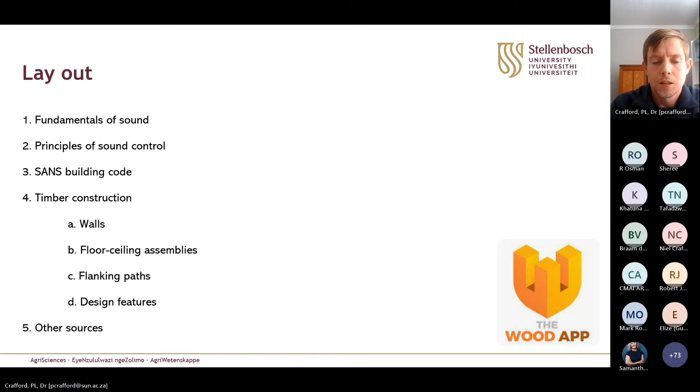So today we will look at the fundamentals of sound and the principles of sound control, how to manage sound behavior, especially in timber buildings. We will look at the two relevant SANS building codes when it comes to residential and non-residential buildings and acoustics. And then we will look at a few timber details, mostly timber frame and some CLT design details for acoustics.

So wood can either enhance sound or absorb and manage sound. We know right across the world we use wood for many instruments, and at the same time a lot of times the recording studios are manufactured from wood elements, so it has the ability to either enhance sound or control sound depending on what you want to achieve.

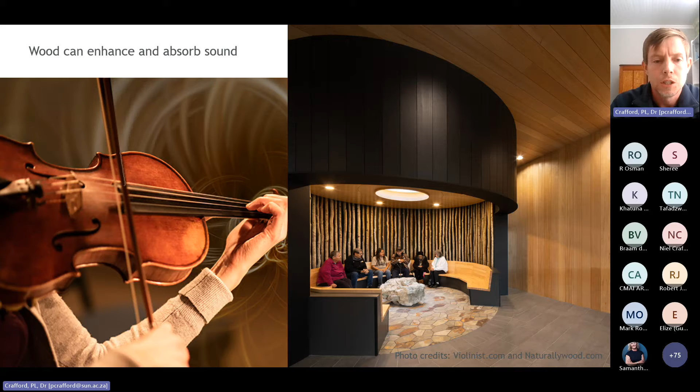Looking at the fundamentals of sound, sound waves propagate in all directions, so it's good to understand how sound waves move from the source. And also sound waves differ in terms of loudness and pitch. You will get either higher or lower amplitudes, and also different frequencies in which sound travels.

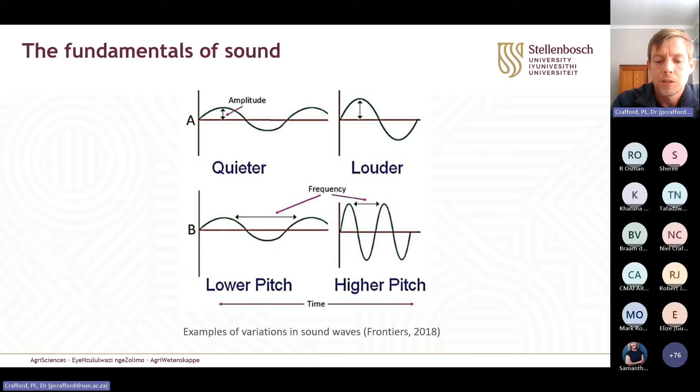Considering the table on the left, the speed of sound differs for different mediums. Air is a lot of times considered as a constant, and the travel speed is only 330 meters per second at 0 degrees Celsius. And then different mediums like brick and wood and concrete have higher sound speeds as the sound wave hits those mediums. And it's interesting to note that there's a difference between softwood and hardwood.

For softwood, the speed of the sound wave would be closer to 3,000 meters per second. For a denser hardwood, it's closer to 4,000. Then you can go all the way up to steel or aluminium, where it's more than 6,000 meters per second.

On the right-hand side, we can look at the table in terms of decibels. That's the loudness, how we typically measure sound. A whisper would be 30 decibels, for example, and a face-to-face conversation, almost similar to what we're having now, would be 60 decibels. And then all the way up to very loud noises like a jet engine of more than 100 decibels, 140 decibels actually.

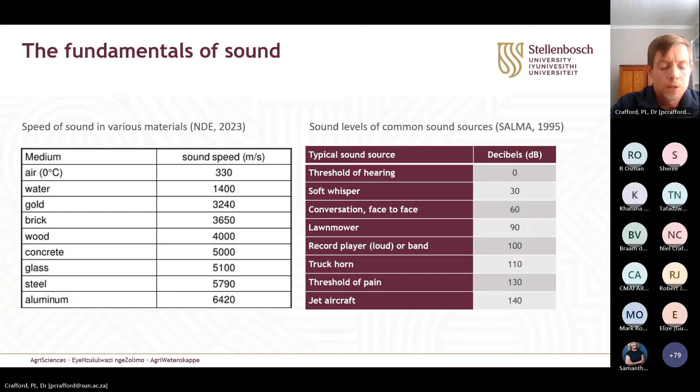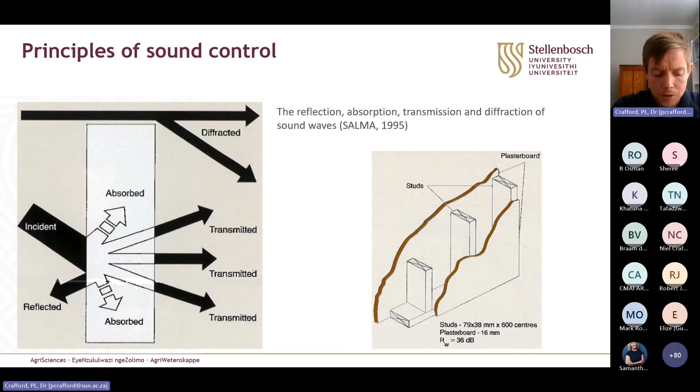So looking at some principles of sound control, or at least the behavior: sound can either be reflected or absorbed, diffracted or transmitted. And if you look at the picture on the right-hand side, if you build a simple internal timber frame or a drywall construction, you would see that that would happen if there's no insulation or the right design. Sound would be either reflected, absorbed, or transmitted without getting a very good decibel grading and acoustic performance. So you might still hear someone in the next room if they shout or speak loudly. So we will look at some details to overcome that issue.

Also managing sound inside of rooms. On the left, you see a perforated sound absorption panel that's used for reverberation control or echoing and managing, I would say, white noise in auditoriums and classrooms to equalize and stabilize the movement of sound and noise.

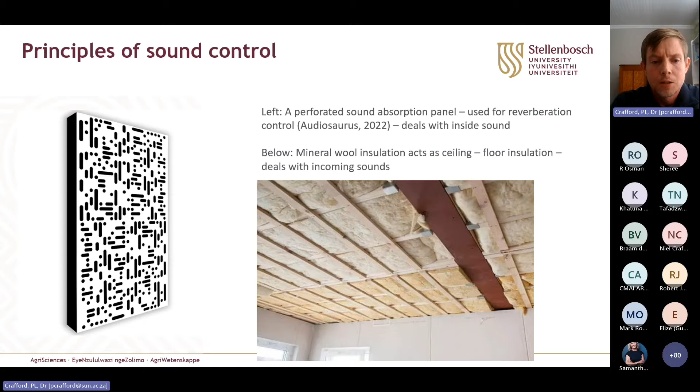And at the same time, on the right-hand side, you will see mineral wool insulation in ceilings. So by adding this, and even a suspended ceiling, you already improve your acoustics by a high degree. And we will look at more detail just now. So this type of ceiling will also manage incoming sound from outside.

Considering two of the relevant building codes that deal with acoustics in residential and non-residential buildings, SANS 10103 deals with the measuring and classifying of areas into either E1 or E2 zones, classified, say, for residential development and perhaps for industrial or other uses.

And then SANS 10218 Part 1 especially deals with the grading requirements for different buildings, on the facades or inside between rooms; different bedrooms or bathrooms all have different gradings. And also, if you look at the tables on the bottom side, table 2 and table 4, they will have an HG and an SG, which stands for high grade and standard grade ratings that one can consider as an architect to obtain your required decibel or performance.

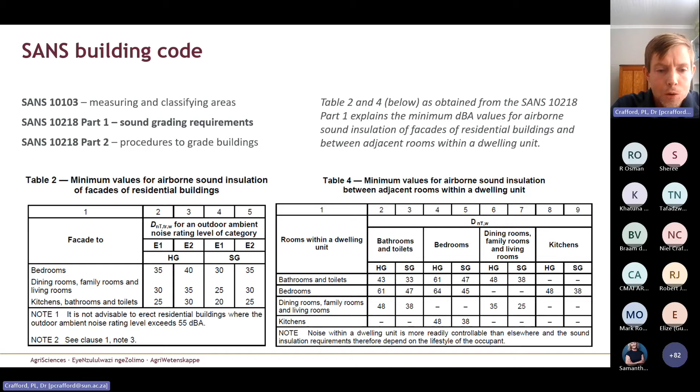What's interesting to note is at the bottom on the left, it says it is not advisable to erect residential buildings where the outdoor ambient noise rating level exceeds 55 decibels. So even if you design the best building, if you use glass or normal doors and a standard roof, you will have trouble managing the indoor noise environment if your outdoor ambient noise is too high. And on the right, it says noise within a dwelling unit is more readily controllable than elsewhere and the sound insulation requirements therefore depend on the lifestyle of the occupant.

So what it's saying is inside noise is a different approach than outside noise, because it's possible to control your inside environment. If you have a teen who likes playing loud music, that's something you can control. Or if you know where to place your bedroom in your house, you can put it perhaps not next to the bathroom or the kitchen, etc. So I will now move to the next part, or perhaps just say something on Part 2.

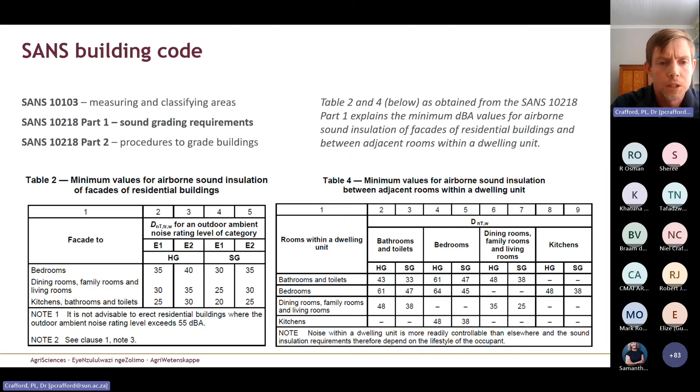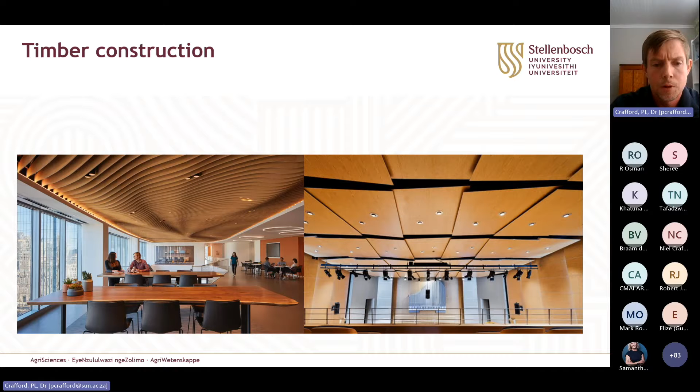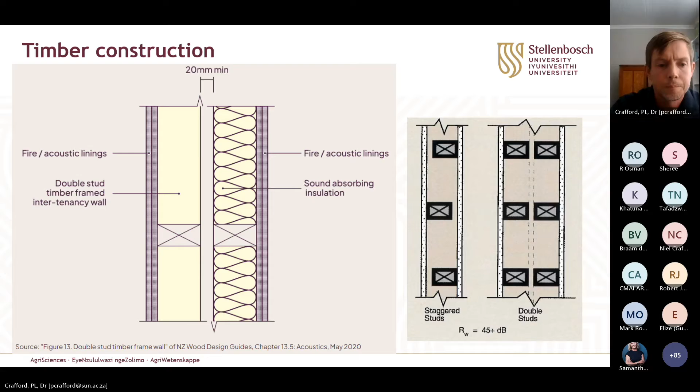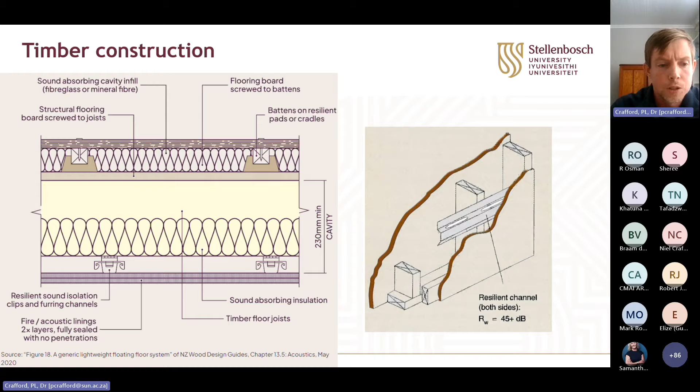And then at the top, there's a subfloor, and then there's the battens on the resilient pads or the cradles. So you can see the top floor is actually isolated from your joist, so it prevents vibration. And then there's some more insulation and your final floor. So you can really build up a Rolls-Royce floor with very good acoustic performance if you do it in the right way. It's important to specify the right resilient channels or furring channels and use the right isolation clips for the job.

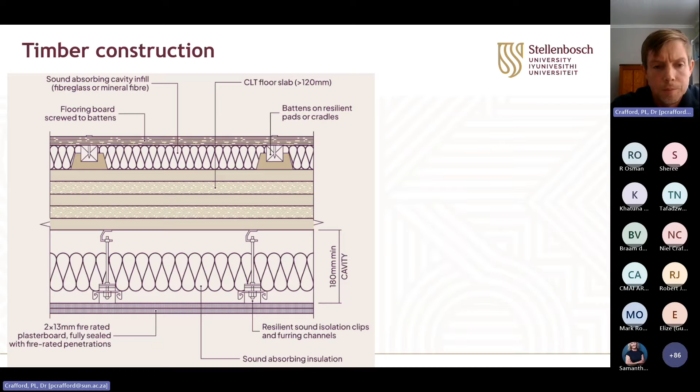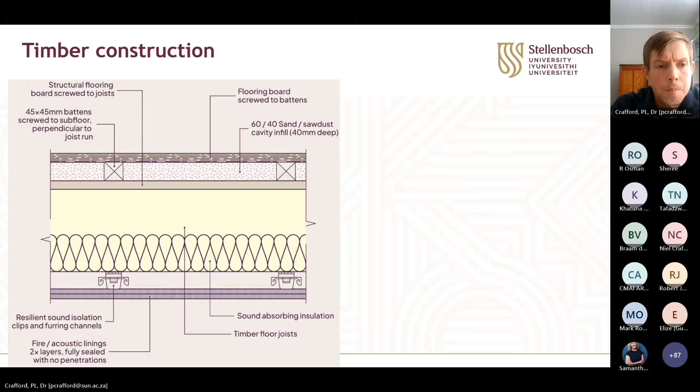And I've been in steel constructions where I could hear someone coming up the staircase in a steel building that is 20 rooms away from the one room, or 10 rooms. So if everything is connected, you can feel the vibration in a light construction.

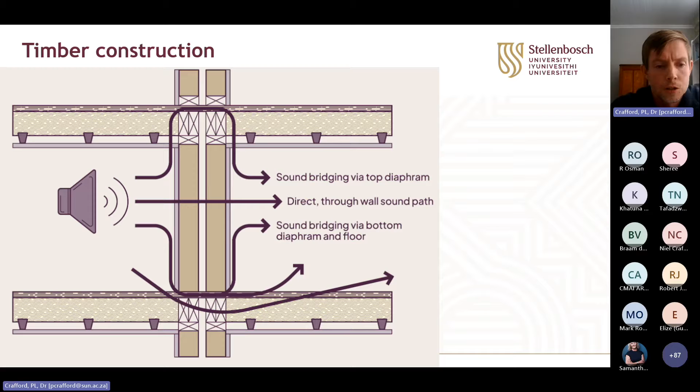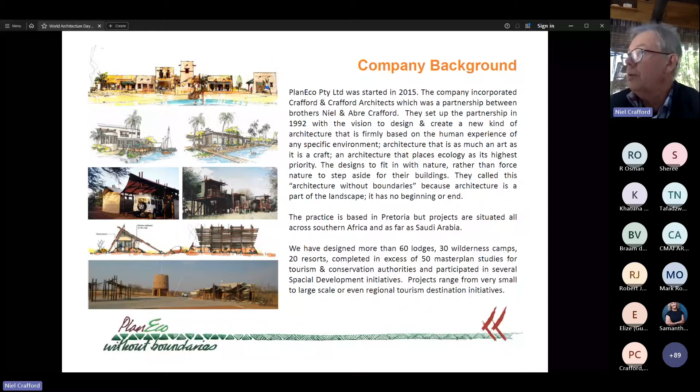Samantha, you gave a very good background sketch about our practice. Thank you very much for that. We have been very blessed to be able to work quite widely in most of the ecotourism industry in Southern Africa and a little bit further afield. And quite often we had to come up with alternative construction methods because of the remoteness of the site, or maybe just because we would like to add some excitement to the destination and rather not have a brick and mortar building. So we have experimented with a lot of other construction methods over the years.

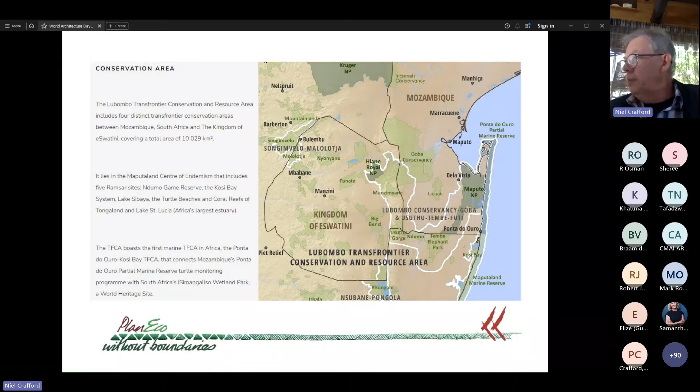The Futi River has been fenced on both sides, and the intention is that once it's opened, which will be sometime soon, the elephant populations of the Maputo National Park and the Tembe Elephant Park in South Africa will be able to get together again. They were separated many years ago.

We had a dual client: Peace Parks Foundation, which is a South African organization that was started in 1997. And they've been very active all over the southern part of Africa with what they call trans-frontier conservation areas. The first one was the Kgalagadi Trans-Frontier Conservation Area, which included the Kalahari Gemsbok Park in South Africa and the other one in Botswana as well.

The Greater Limpopo Trans-Frontier Conservation Area is also quite known. That includes Kruger, Parque Nacional do Limpopo in Mozambique, Banhine and Zinave National Parks, also in Mozambique, and also the Gonarezhou National Park in Zimbabwe. The buildings were handed over to ANAC, which is the conservation authority in Mozambique, and they have 7 national parks all over the country that they're looking after.

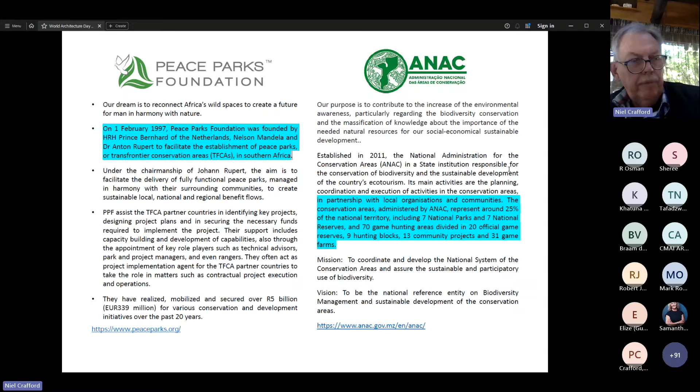The national parks had a hard time during the Civil War, but lots of them are now getting back on track with private involvement, like the Peace Parks Foundation. They were involved in the Greater Limpopo National Transfrontier Conservation Area, in the Maputo National Park. And then we have people like Greg Carr, who's been involved with the Gorongosa National Park for quite a number of years as well.

The client's brief - I'll put on a few items here but be brief, I'll just talk about two - was to develop these tourism facilities, and most important that the facilities had to be low impact and environmentally friendly. It must blend in with the natural environment, and the impacts during construction must be limited, with off-site pre-construction as far as possible.

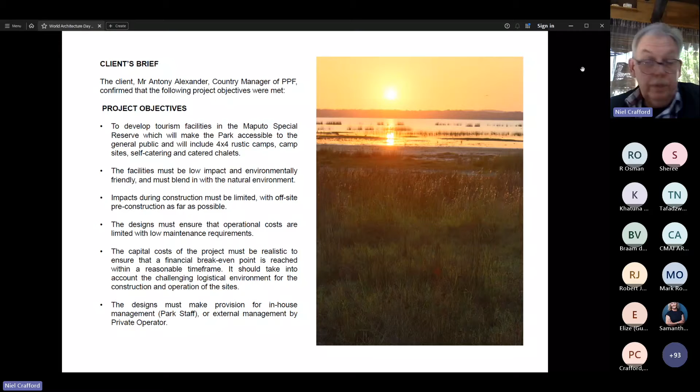Those two items really led us to the building system: the structural timber frame, the timber panels, cladding, etc., which was able to be transported to site. Just by the way, the entrance into the park is at Futi Gate, and from there it's deep sand for 45 kilometers to Ponta Membene. So you need a proper 4x4 to get there, and transport of building material obviously had to go the same way.

Design influences were mostly about not spoiling the environment, as I pointed out earlier. We try to ensure this by making sure the construction methodology is suited to the conditions on site - the deep sand I referred to - using lightweight construction elements small enough to get through the narrow winding tracks on the way to the site.

The buildings were positioned very carefully to minimize the cutting of trees and branches, and all cutting, clearing, and trimming was done under my supervision. I had a little team with a chainsaw and a few pangas, or machetes if you want. And that's the only time the chainsaw worked, was when I was on site - otherwise it was hidden in a stall. People can get quite dangerous in the bush if you're not looking after them.

The building material had to be controlled. Material was carried onto site by hand - no little dumping trucks all over the place. All footpaths were properly demarcated, and that's the only place people were allowed to walk. And then waste was very carefully monitored - it was separated on site and then taken to the gate and handed to recyclers or properly disposed of.

Most importantly, time on site was limited by designing a system that was manufactured to a large extent off-site and then just assembled on site, almost like a Meccano set.

The other factor that influenced the design was the height of the tree canopy. So the roofs were broken into smaller segments and kept at a 15-degree angle so that they don't stick out above the trees - that first slide might have shown you that.

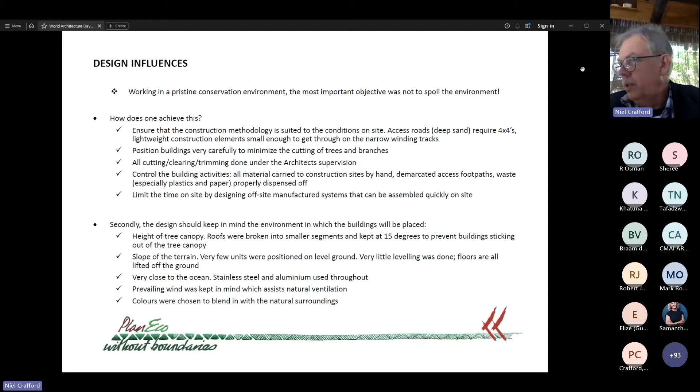The slope of the terrain is on the coastal dune part of the development, so very little leveling was done. The units were actually lifted off the ground, as you'll see just now. And it's very close to the ocean, so no normal metal - just stainless steel and aluminium were used throughout. Roof sheets, bolts, nuts, door handles, everything had to be rust-proof. Prevailing wind was kept in mind and was also used to assist with ventilation of the units. Lastly, the colors were chosen to blend in with the natural surroundings.

You then have huge grasslands with beautiful inland lakes next to them, reeds around them, lakes full of crocodiles and hippos, and incredible bird life. You have the vegetated dunes on the way down to the beach, swamp forests, and coastal forests.

It's one of the most pristine conservation areas, I think, in the whole of Southern Africa that I've been to. Mostly so because before the road was tarred between Maputo and Ponta do Ouro, or Kosi Bay border post, it was not an easy road to take. It was sand tracks all over the place. It would take you, on average, driving from Swaziland to Goba border post down to the site, about 6 hours in the dry season. In the wet season, deep water puddles might delay you even more. Nowadays it's an hour-and-a-half drive. The good thing was that it wasn't impacted so much by humans for many years, and that's why it's such a wonderful environment to be in.

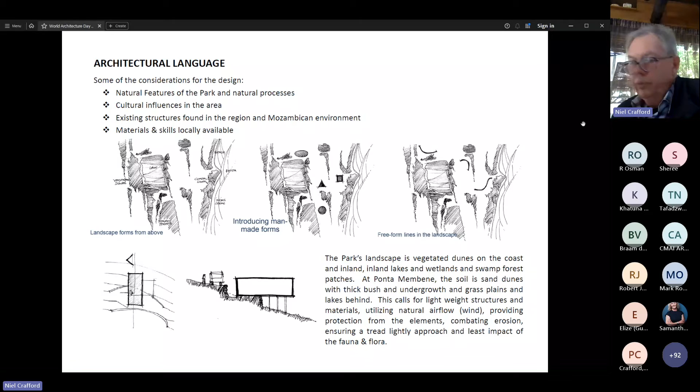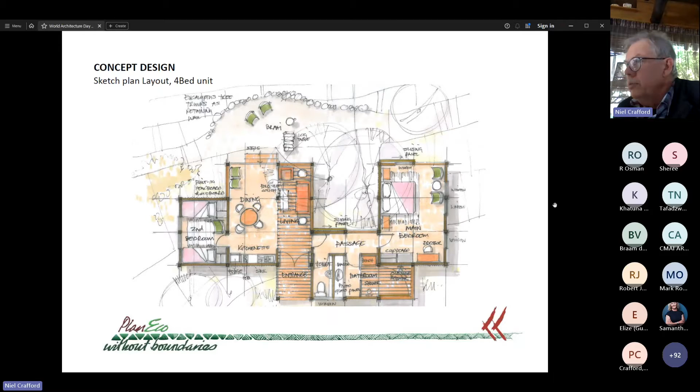You can see the 15-degree sloped roof panels in smaller segments with lots of box gutters in between. We did end up having a leak-free roof, but it took some time to get there - not because of the box gutters, but because of other factors that crept in.

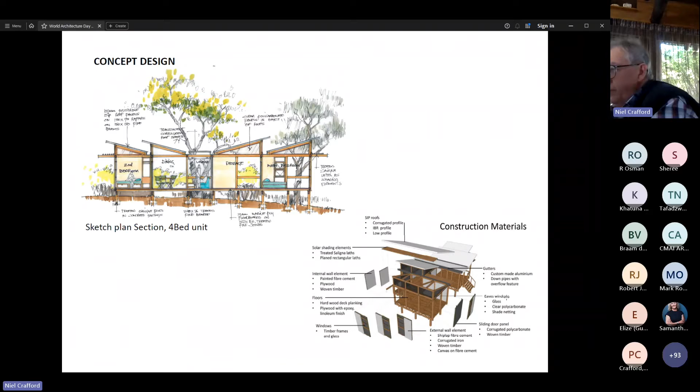On the bottom right there's an exploded view of the construction, but it'll be easier to explain with a little sequence of sketches I made in the beginning to show the client how we're going to build this. You start off with gum poles, planted in sand - just dug a hole, put them in using laser-guided technology so they're all in the right place - then filled back with sand with a 10% mix of cement. It's called soilcrete; you just dampen it and stamp it down. No concrete foundations at all.

On top of that you put the bearer beams, 228 by 50 mils, all treated obviously. You then put the joists at 450mm distances because of the decking, or marine ply floors, that goes on top. Interesting - normally you'd fix those joists with hurricane clips, galvanized members you screw to both bearer and joist to keep it in position, but there were no stainless steel ones on the market, so we couldn't do that. We ended up putting in 38 by 38 little pieces of wood screwed to both bearer and joist to replace that - I'll show you on the photographs later.

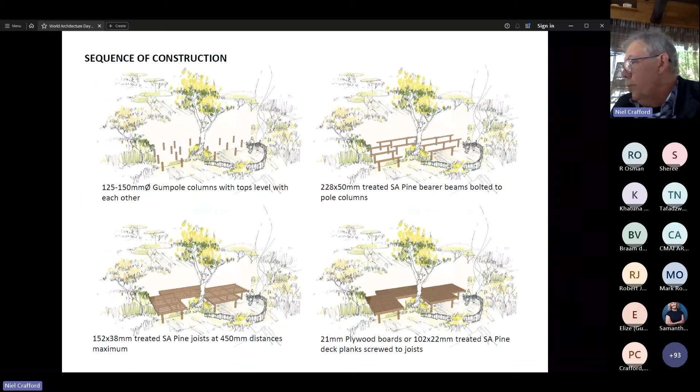The plywood boards, or treated pine decking, went in next. Then came the laminated timber frames, 132 by 132 laminated timber produced by White River Sawmills for us, sent in long lengths to Ecolog Homes in Johannesburg, who cut them to size and notched them where needed so the columns and beams could be fitted together. They also made all the other SA pine treated panels that go in between the structural frames.

Once those were up, along with other beams in the other direction - the first top left-hand slide indicates the one directional columns joined with a ring beam on top - and in the other direction we had shorter ring beam pieces put in and kept in position with galvanized brackets and stainless steel screws.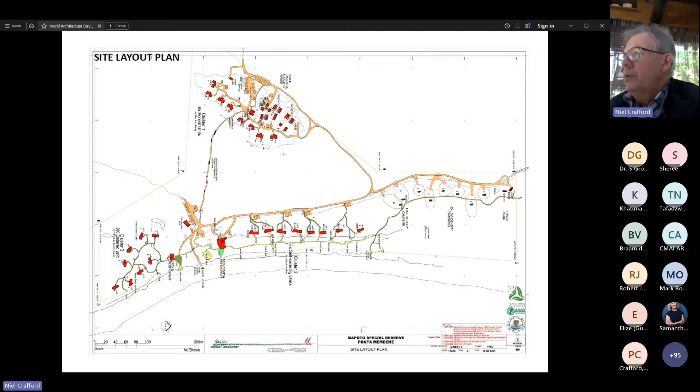In the forest to the south of the primary dune, there's a very thick forest area, but luckily quite level, in which you put 8 forest units, or we call them hilltop units. Then towards the back, because of limited space along the primary dune, we put in a further 8 forest units, the reception area, and the staff village.

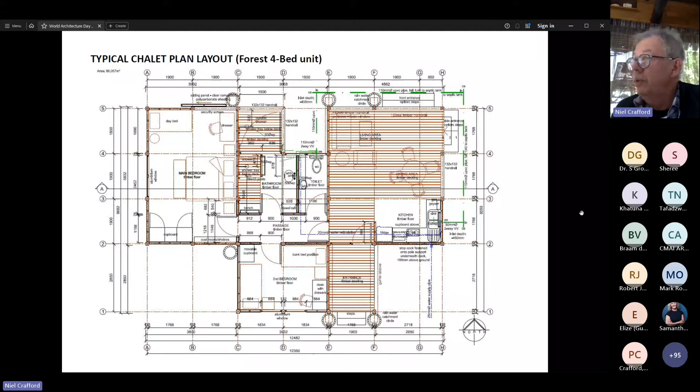I'll just quickly run through the technical drawings, there were many of them, I can assure you. If you do a brick and mortar building, you draw 2 lines and you've got your wall in plan. If you do an alternative construction building, you do like 9 or 10 plans before you've illustrated everything that goes into the construction of that wall. So it definitely was a very steep learning curve for us.

We just kept on drawing forever and ever. Fortunately, it was during COVID, which kept us off-site for a year and enabled us to finish all the drawings in time to go to site.

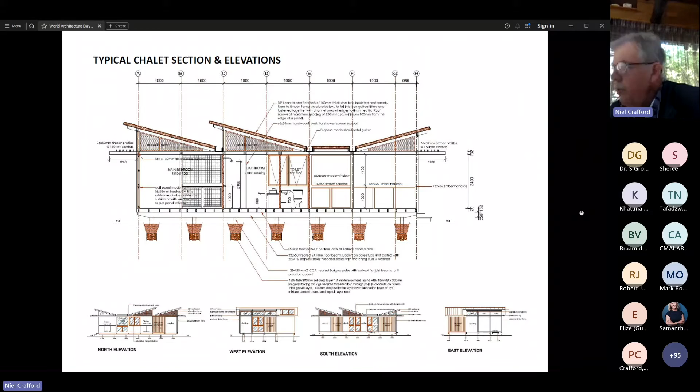Typical section, elevations at the bottom, indication of the type of drawings you need. The one on top is just the bearers. Underneath it would be the placement of the gum poles itself. On top of the bearers you have the joists, and then later on you have a roof structure.

We had some shading elements along the sides. The gutters layout, and the gutters all had to be designed because on the sides of that box gutter, you would have either a flat roof or a roof at a 15-degree slope, or an upstand vertical window, or nothing at all. So lots of gutter profiles. That was nuts, I can assure you.

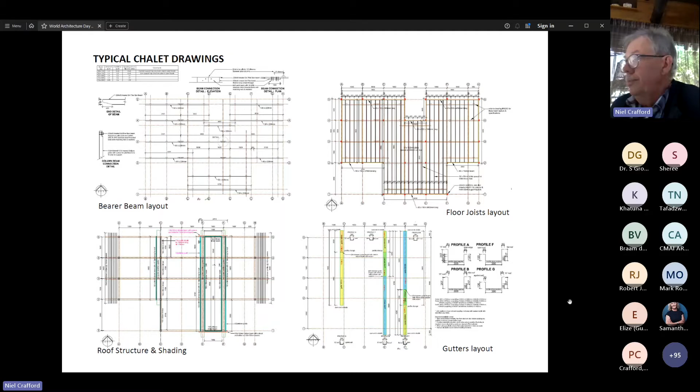The internal cladding came in later, once all the services were put in position, and it consisted of PVC foam board, which was a fairly new material at that time on the market. Wonderful stuff to work with, it doesn't crack, you can router it, you can drill it, you can do everything with it. We ended up not even painting it, it's got a washable surface, and they're all white.

We fixed them with stainless steel screws imported from Germany, so they're very nice looking and they're very expensive. So we didn't even hide the screws, you can see every screw that we used to fix the panels with as you go into the building.

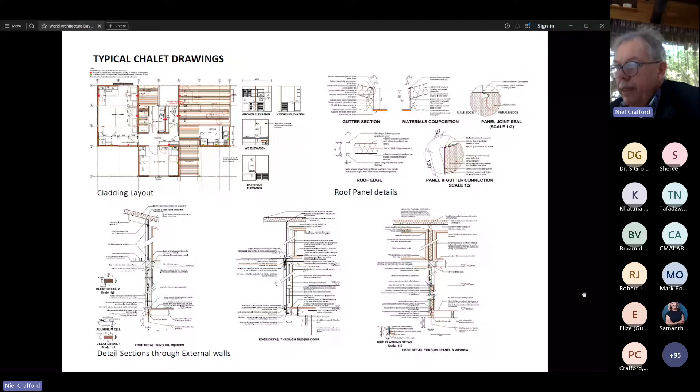Lots of details to indicate all the different materials get together and how you make it waterproof, etc. Right, let's get to some of the photographs then.

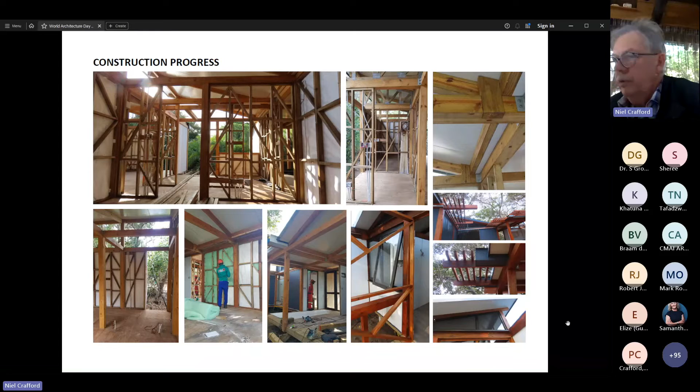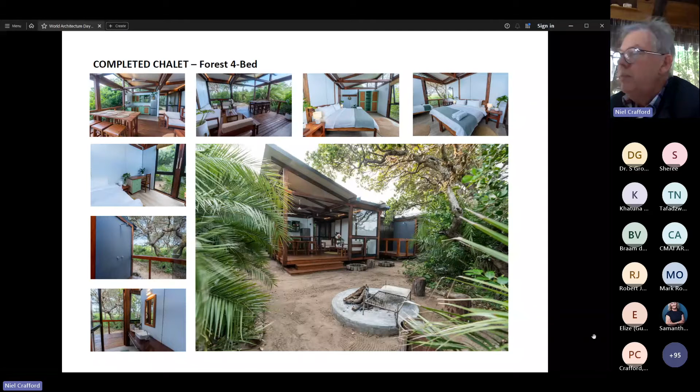Right, quick look at some of the completed chalets. These are the forest chalets. This is a 4-bed unit. It's got an external braai area. You can see the bigger photograph. You can see it's a fairly open building. The dining living space is in fact very open. And then the bedroom, if you look at the left-hand column, the second one from the top, that's the windows. But then when you open these sliding panels, then you actually feel like you're in the middle of the forest.

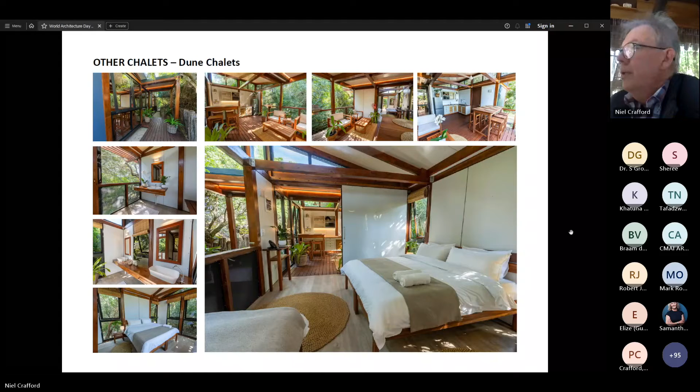Hilltop chalets, some of the photographs taken at night. We used LED light strips very effectively, which were aligned to shine up against the underside of the roof panels. So you have a beautiful diffused light, no exposed lighting. Once again, we want to have a minimum impact on site.

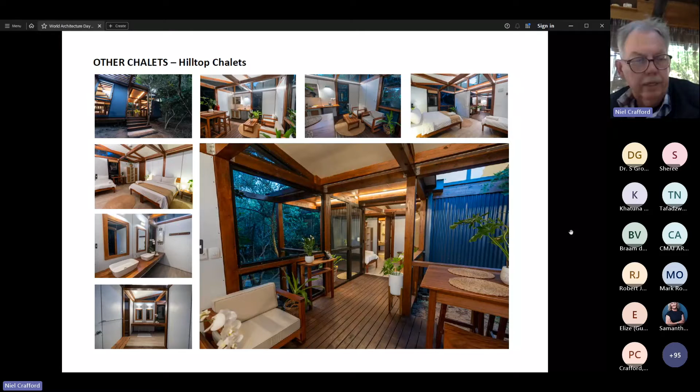The restaurant building, we still collect rainwater from the roofs, and that gets treated with the water treatment plant and then becomes drinkable water. The development is provided with a borehole, but there's a lot of iron in the water, which makes it unsuitable for human consumption. The restaurant's the only building that looks out on the beach and that you can see from the beach. It was positioned in a place previously opened by a campsite. Not supposed to have done it, but the bush was taken out on top of the primary dune, and the dune started eroding away, and the EIA allowed us the opportunity to say, we'll put a building there and then prevent further erosion in future, and they allowed us to do that.

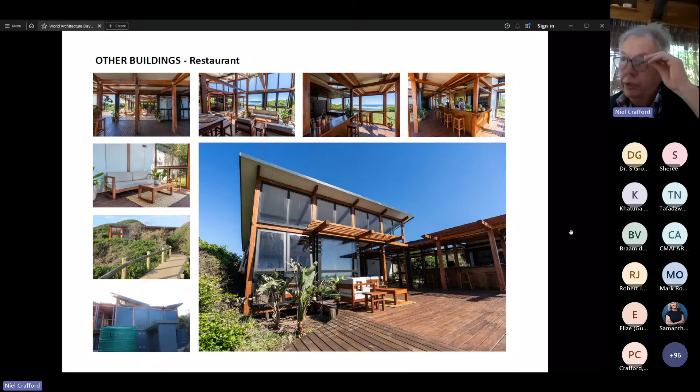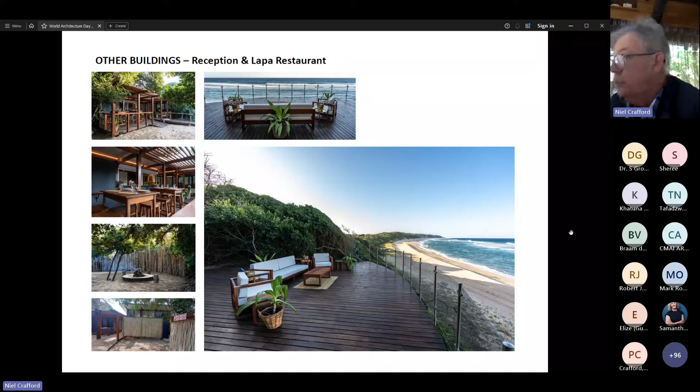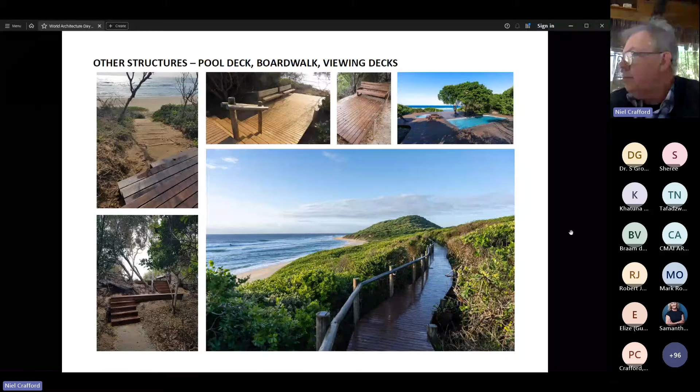The reception building, there's one viewpoint at one of the smaller restaurants that overlooks the beach. And it's used mostly during the mornings and late at night. During the day, the wind quite often blows. So the lapa to the left, you can see there's a lapa with a fire, is a very protected area adjoining this deck, and that's where you would normally have your meals. There's a 300-meter long boardwalk that connects the dune chalet units. This is on the seaward side of the primary dune. It's got a wonderful view across the beach when you walk between that and the restaurant.

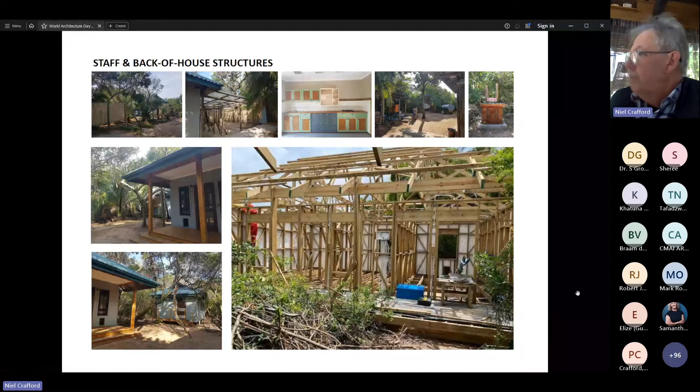And then just out of interest, the timber frame construction, and I'm sure a lot of you have seen this in the past, is done quite widely in Mozambique, and it seems to me like it might be the case along other parts of the coast in South Africa as well. It's a timber frame thing made up with pre-made panels. You connect them together, you put up your trusses, you put conventional cladding inside and out, you have a sloping roof fall, most probably fiber cement roofing as well. So it's not rocket science. Not many architects do this, but that's the way most buildings get built in Europe and in America as well. A couple of side views just indicating that you don't really see the development except for the restaurant, as I pointed out.

And just look at the time here. My two main objectives were the following. I would have loved to not have you see any buildings when you arrive on site, that you would park your car in a car park. There would be a sign saying this is a car park, so you park your car. And only when you walk through the first 20 meters of bush and you get to the reception do you know there are actually buildings in this development. And it turned out like that on site. Should you ever get there, you will probably experience it that way.

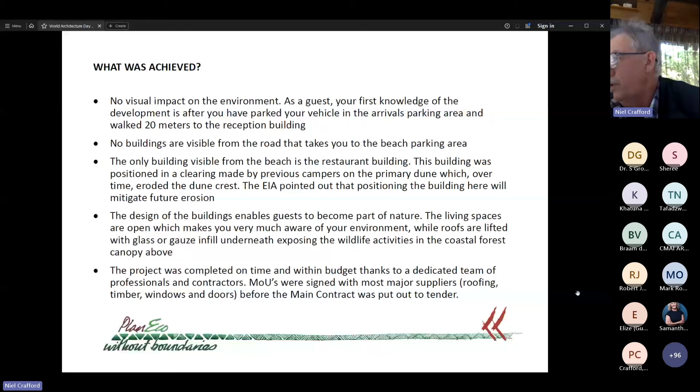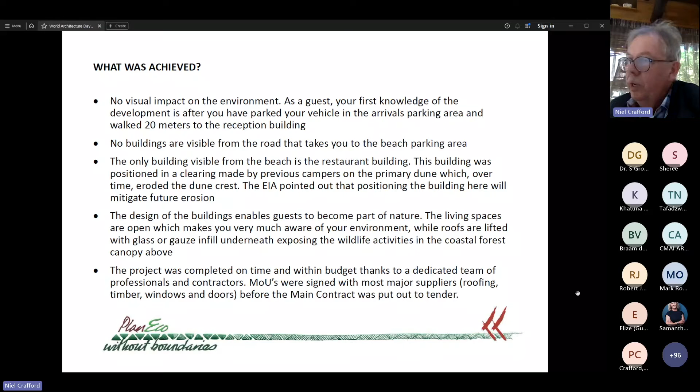And then secondly, we wanted people to become part of the environment and to enjoy this incredible natural environment that the building was put up in. And I think we've managed to achieve that as well, with the openness of the buildings and the very simple architectural design. We actually allow nature to provide the focus for the development. We spoke about most of the sustainability issues.

Yeah, we've got good cross ventilation. At the highest point of the internal space, where the sloping roof is at its highest, we've put in very finely perforated panels, so that all the hot air can escape under the roof sheets. There's cross ventilation through all the buildings. We've got fans in it. It gets very hot there in summer, and the humidity is very high, so a fan would help a lot.

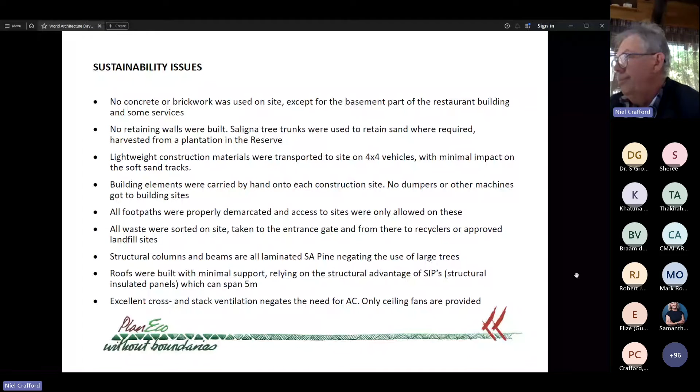And then we have our project team. We had an incredible, well-organized project manager, Louis van der Merwe, who lives in White River. He and I used to go down to site together. None of the other professional team really got there. On a monthly basis we'd put up a little tent, stay there for a few days, and do our site visit.

And we had the most incredible contractor, Felix Construction, nowadays called Radix. They're based in Maputo, in Matola. There's an African guy that heads it up. And in my 42 years in architecture, they have been the best construction team I've ever worked with. Incredible. We were so happy to have them on board. That's it. Thank you very much.

Thank you so much, Niel. It looks absolutely beautiful. You're getting a round of applause from all the delegates here. It's stunning, and well done to your team on a very ecologically sound construction. Maybe you might even get a few people wanting to visit. So thank you so much. Next up is Mark O'Connor.

Thank you very much, Samantha. Very, very impressive structure that we've just seen. My only comment is that I wish you guys had known about some of the expensive Italian screws around, but I digress. We'll talk about soundproofing solutions today.

As a guy that works for an Italian company, we have quite a big insight into what's happening in the European market. Fire and acoustics are two of the really big topics currently being investigated and tested in Europe. The other really big one at the moment is high capacity beam hangers or hidden connections, all designed to take very, very high loads, and also how they react in fire.

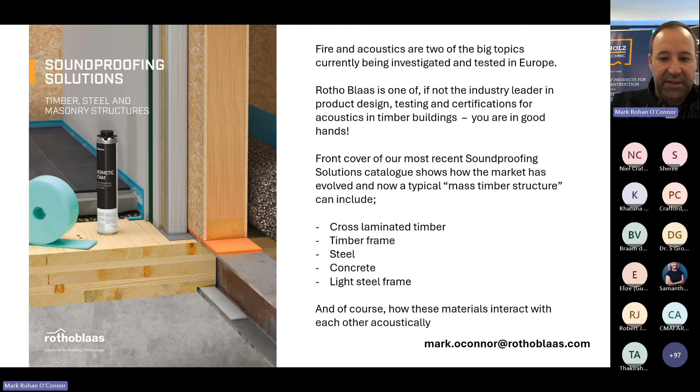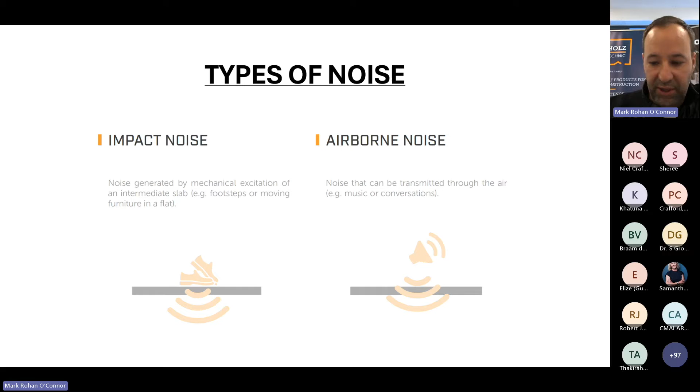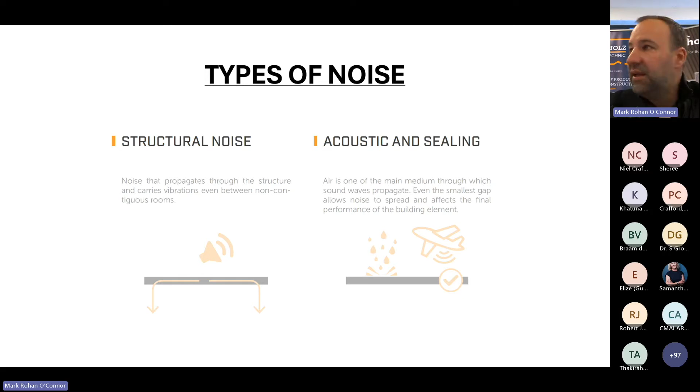Just a few notes on noise. We have 4 main types of noise, and often one type of noise may present itself in more than one category. You'll have impact noise; a good example is someone walking on a suspended timber floor. Airborne noise, which is what you're hearing right now. Structural noise, which Philip touched on, flanking essentially, which is how noise travels around through the structure, notably in fixings and steel elements. And then acoustic sealing, which is basically the sealing of air gaps.

When we talk about acoustics and soundproofing, we use decibels, and these are often not very impressive numbers when we talk about how much performance improvement you will get. Decibels are a logarithmic quantity, so a 3 decibel increase is equivalent to a doubling of sound energy. Essentially, if you have a radio plus 10 decibels, that is now equivalent to 10 radios. So you're looking at making small improvements in decibels. I hope that gives you a bit more clarity on the numbers we're talking about.

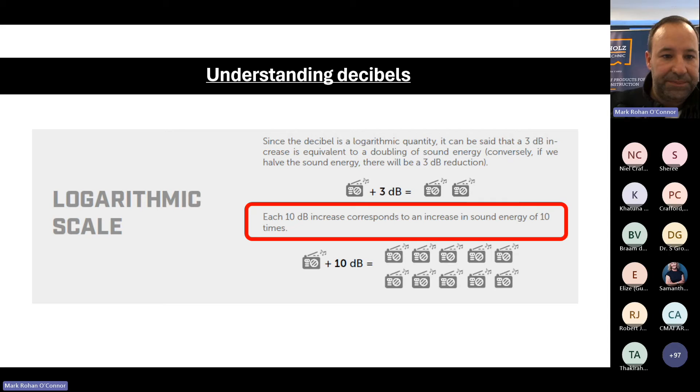In our experience, you have three main objectives when it comes to tackling sound. You typically want to look at sealing of any air gaps, and your first jumping off point would be the correct use of membranes, foams, tapes, expanding profiles. The second thing that you want to look at is adding density. As Philip was mentioning, sand and sawdust.

I've seen, for example, on a Swiss building show where the guys had a CLT floor slab and they had upstand joists on it filled up with aggregate. And also, in terms of adding density, you can also use off-the-shelf construction materials.

Acoustics often fights a bit with engineering, because a good acoustic engineer would like to split up the elements, and a good structural engineer would like to tie everything together. So it's a little bit of a dance between the two, and how best you want to solve it, and also how far down the rabbit hole you want to go in terms of creating an acoustically comfortable building.

In terms of design, when we looked at Niel Crafford's project, the one thing I noted on his 4-bed unit is that the bedrooms were on either end of the unit, which makes a lot of sense. So you have your bedrooms separated quite far away from each other, and your living room right in the middle. It also makes a lot of sense if you have a double-story house to possibly have your bedrooms upstairs and your living area downstairs, just from a design point of view.

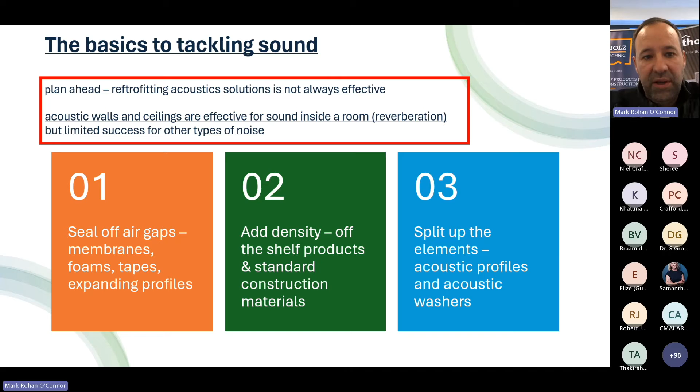When we talk about acoustic walls and ceilings, I often find that these are sometimes specified or designed in a bit later, but these are brilliant products for reverberation, so sound inside a room, but not always the best option for sound that's coming from outside the room. Generally, when you've got sound coming from outside the room, you want to stop that sound on the outside and not deal with it once it's entered your structure.

So in terms of sealing of air gaps, this is a fairly standard product, and generally a big jumping off point for most timber structures is a good quality breathable membrane wrapped around the outside of your structure and sealed so that you don't have any flapping, any tearing, anything like that. Of course, the benefit of using a good quality breathable membrane is it will protect the building during construction, and it will reduce wind noise.

Something that's not always commonly understood: if you look at a 3-layer CLT panel which is not edge glued, this is not an airtight element. And because sound travels through air gaps, you'd find that these little gaps coming through your CLT panel, if you had to be very, very critical of it, will also be a passageway for sound.

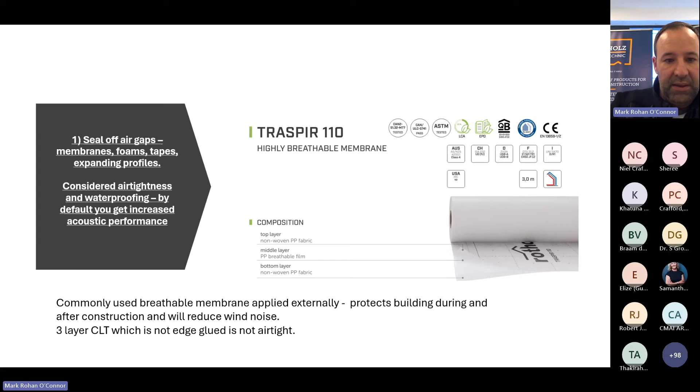So simply adopting a membrane in this application will give you some added acoustic performance. The next step would be to further seal off gaps, especially around windows, doors, reveals. And Rothoblaas supplies a variety of different sealing tapes.

I've given you basically a hierarchy of what we have in stock in South Africa, the different types of tapes: the Easy Band, Speedy Band, Flexi Band, Smart Band, which is very, very good for stagnating or standing water, for example, on windowsills. And then, of course, we have plasterable sealing bands for windows onto masonry structures. So very, very handy products to seal off air gaps.

And really, in my experience, I've certainly walked past many, many windows that are closed and the windows are still whistling at me as I walk past.

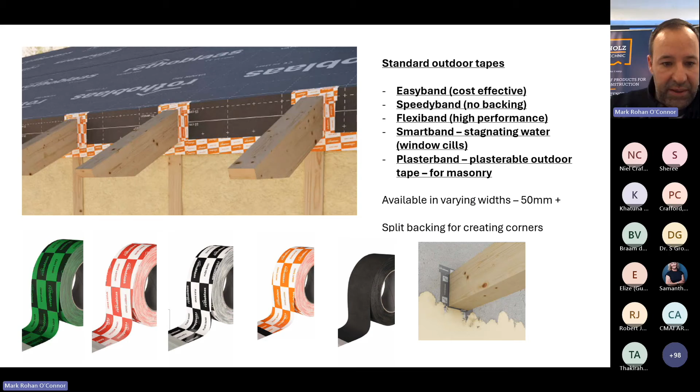I've mentioned a split backing tape over here. This is an example of a split backing tape where you can create internal and external corners with the split backing tape. So very simple, self-described, and a very good way to seal off air gaps and add an element of waterproofing to your structure.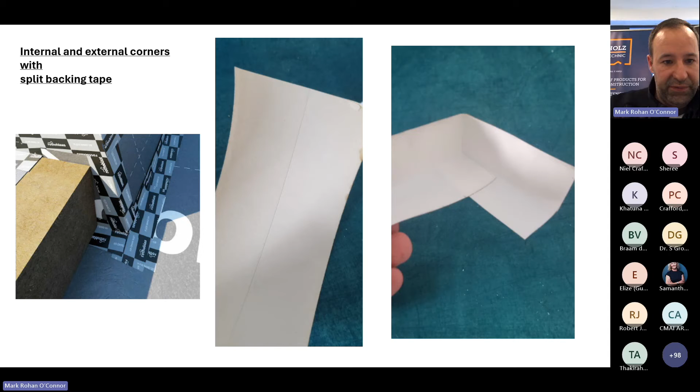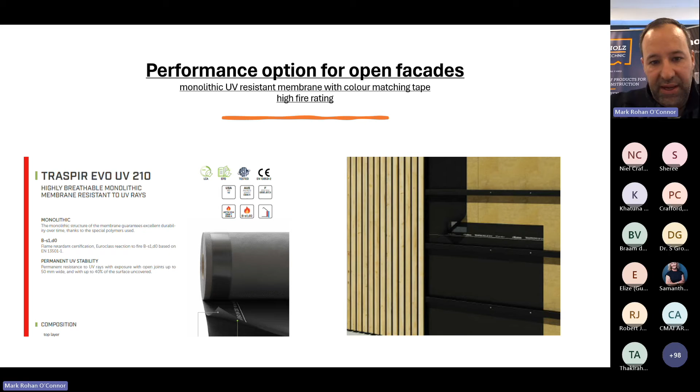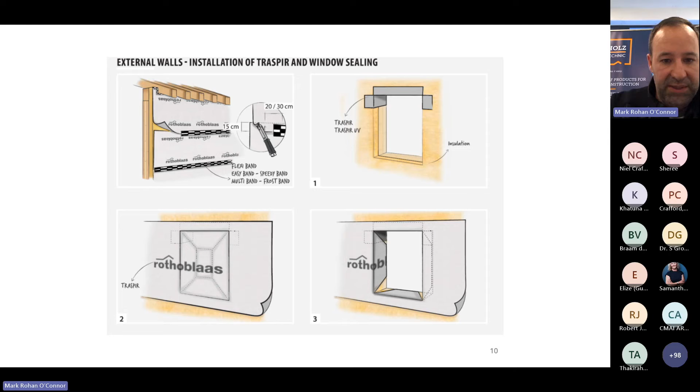Of course, we also have membranes for open facades where it may be exposed to UV rays, where your cladding is effectively open, and also different types of membranes for higher fire ratings and UV resistance. And these are monolithic, which is basically a chemical reaction as opposed to a microporous reaction. And just some basics on good practice for using membranes and tapes around windows, so just a step-by-step instruction on that.

The next group of products, which I think should be in each timber framer's or CLT guy's toolbox, is a range of expanding profiles and foams. We have a variety of them, expanding bands. These tapes or these profiles will expand, so generally it's a good idea to have a clamp on them. And we have them in a variety of different pedigrees, as well as different types of fire resistant and more cost effective and high performance foams.

The advantage of something like an expanding profile is you do not have to tool it afterwards, whereas often with foams, once you've used them, you do have to tool them. The converse side is usually once you've used an expanding profile, you would then generally seal it with a construction sealing tape afterwards. So it just depends on how one wants to work and what your desired outcome is.

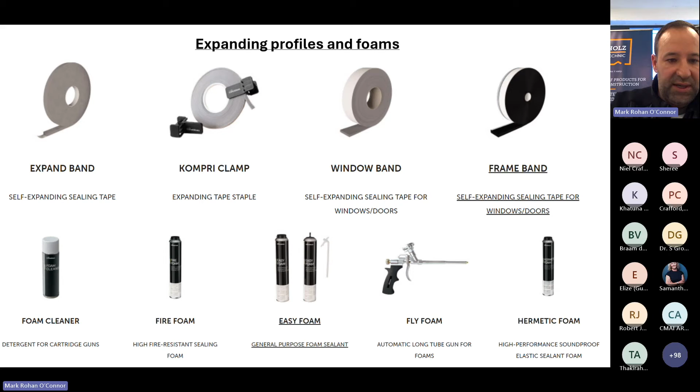To come to my second point, adding density. I really like this construction detail. I think it makes a lot of sense. You have your exposed timber beams as almost like a permanent formwork, as well as your soffit. You have an acoustic mat. In this case, the green acoustic mat you see is called Silentfloor Bytum. You have your perimeter separation, which is right up at the top. And this is to prevent flanking or noise transmission from going around the element.

And you have your starter bars, mesh, and CTC or concrete screws to create a composite floor, and you can be using something like a screed or a lightweight screed to create a very good engineered composite floor. You get the benefit of using possibly less timber than one might use if it was pure CLT.

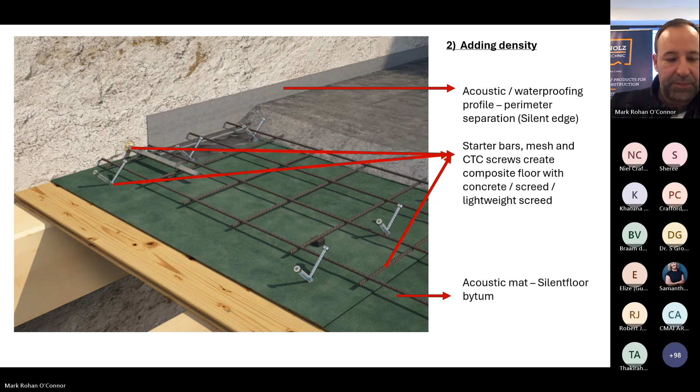Also, another way to add density to a wall, for example, is Silent Wall, which is also a bituminous-based membrane, which can either be stapled to a wall, or Silent Wall Bytum, which is self-adhesive. And these will also dampen sound traveling through, for example, a timber frame wall or possibly a light steel frame wall. So off-the-shelf solutions with known values of decibel reduction.

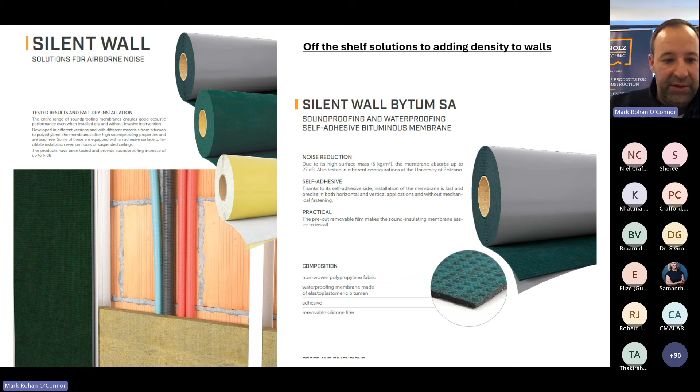Some acoustic and sealing profiles. I've basically listed them in hierarchy. Construction Sealing is a very typical sealing gasket for regular joints. It's made out of EPDM, very cost effective. It can be widely used around sites to join panels, to block off air gaps, to create nice, well-sealed structures.

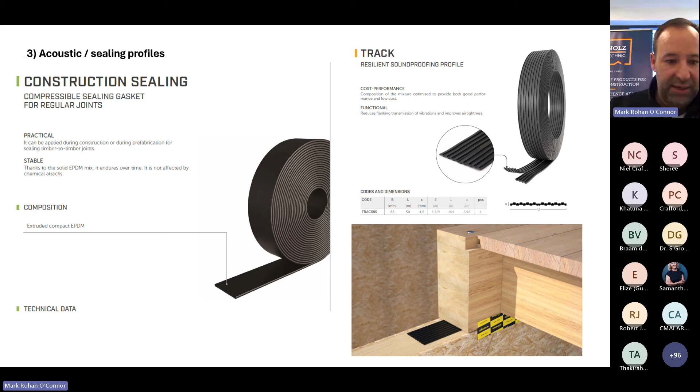The next product that we'll be looking at is a product called Track. This is an uncertified product. It's tested, but it's not certified. So it's a good performance product. We've seen some very, very good results using both Track and your Aladin Stripe over here. These can be split down the middle for smaller sections, and also a very, very effective way to block off sound.

Going on to the slightly more technical side, we'll be looking at products like Piano. Piano, and the next one that we'll see, Xylofon, are designed to work with loads on a timber structure. So your shore, your hardness and your softness, will depend on the load applied to it and also on the acoustic load. So you'll see there's quite a wide range of the different products, and of course we can work with the designers on specifying the right one.

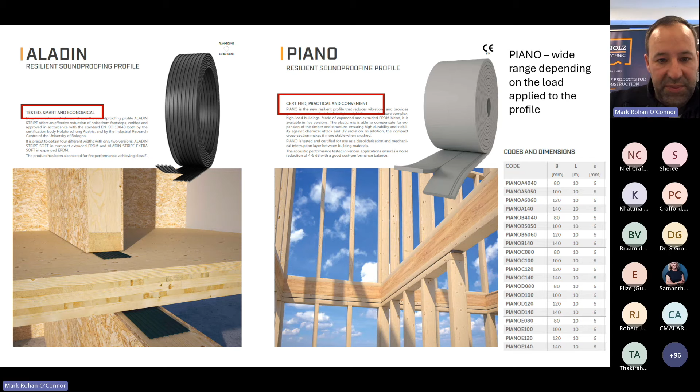Then of course, Xylofon. These are for really big multi-story mass timber buildings, and their hardnesses will increase based on the load. So lower down on a building, you will have a much harder or higher shore Xylofon membrane or tape, and this will decrease as the building rises, depending on the load of the CLT walls and floor panels.

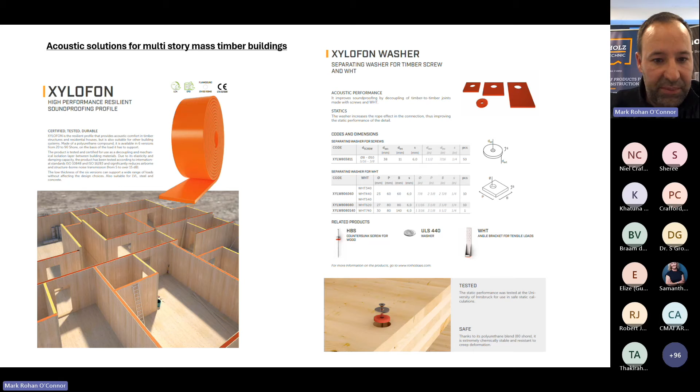With that, you will also get a Xylofon washer, which is designed to stop flanking noise from screws going from one side of a floor or a wall and transferring that noise into another CLT or another part of the structure. Here you can see Xylofon plates as well. Angle brackets are steel elements, so you insert or isolate the steel elements with a Xylofon plate to prevent noise transmission from running through them. So you can see these are high performance products for large loads.

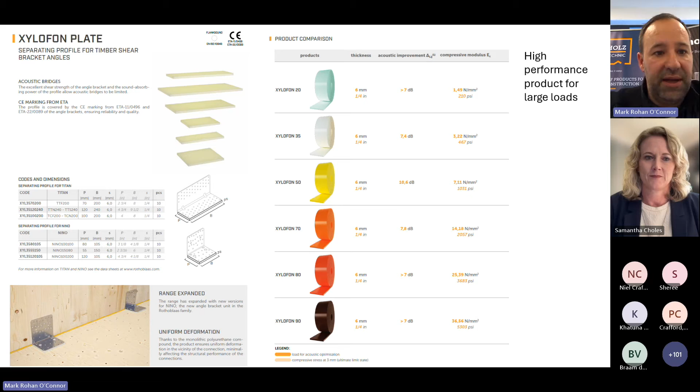Yeah, and that is essentially my talk. One thing I'd like to leave you with: I've got a Slovakian colleague, and he was mentioning to us a CLT house he knows of with a kids' bedroom, spare room, parents' bedroom. The parents could hear the kids play with the spare room in the middle. So spare a thought for what the kids would hear. So I'll leave that.

Oh, that's a delightful thought. Thank you. Thank you, Mark.

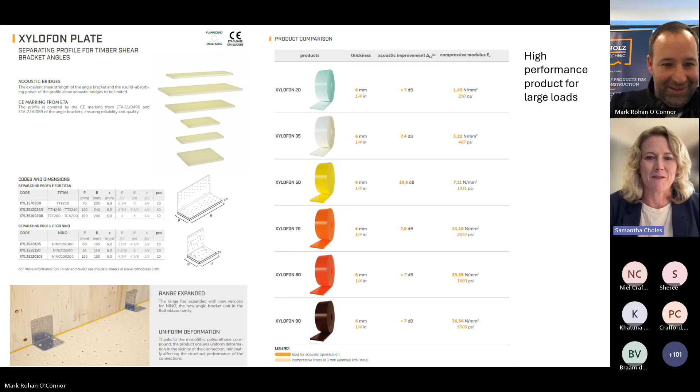Just going to go with some questions in the Q&A, or I think there was one at least, from Miles Hollins. And I think this one is for you, Philip: are the SANS 10103 and 10218 mandatory standards? I'm not sure about that. It probably depends on the project. A lot of times, new developments will probably specify that depending on the developers. So I'm not entirely sure. And of course, there's a lot of existing buildings that perhaps also don't conform to certain acoustical performances. So yeah, it's a good question, and I'm not entirely sure of the application in new builds, and probably depending on the developer. Thanks, Philip.

And then I think a question for Niel is, how did you design to keep monkeys out? Because I noticed in particular, it seemed quite open plan. So perhaps you can just answer that for Stefan. Yes, that's a good question, and that shows that some of you people have been out in the bush. Monkeys are not born naughty. They're born as any other wild animals. They roam and they look after themselves. And during all our time on site, during construction, when we camped there, as I say, in the middle of nowhere, there was nothing there in the beginning. We saw a lot of them, but they kept their distance, and they still do.